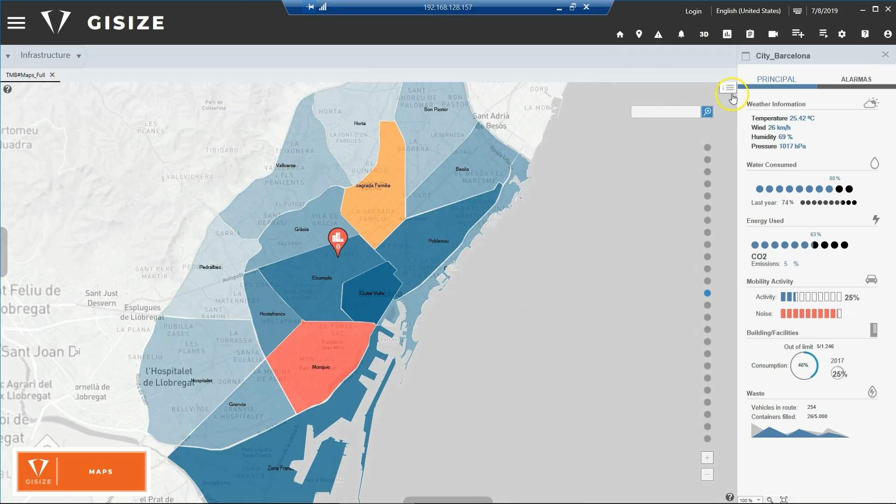This is the Barcelona districts, and you can see the different districts. And if there is an alarm, you can directly, on your faceplate, integrate with it, interact with it, see what's...

...happening. You have some shortcuts - specifically, if you want to go to a certain asset, you can go there. You have your layers for your convenience, whatever you want to see.

You can have your industrial graphics as well. We have native GISIZE graphics too for shapes and markers, but industrial graphics are also available for you.

On top of that, as I mentioned, Google Map is part of the map providers, but also Google Map API. This gives you some cool features, mostly UI, but don't let it fool you, because we also have things like traffic—we can embed Google traffic data directly here. And you can have offline maps, demo maps, and define a map provider as a layer and superimpose one map provider on top of another. A heat map, for example, is an interesting application.

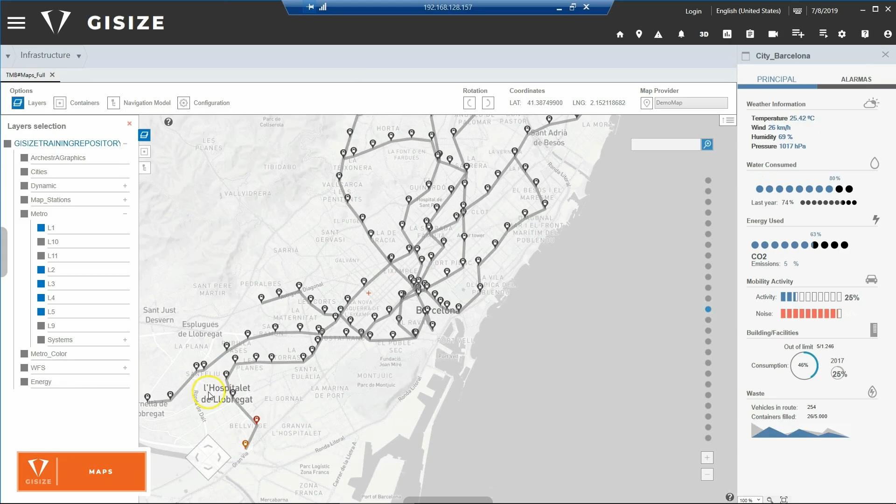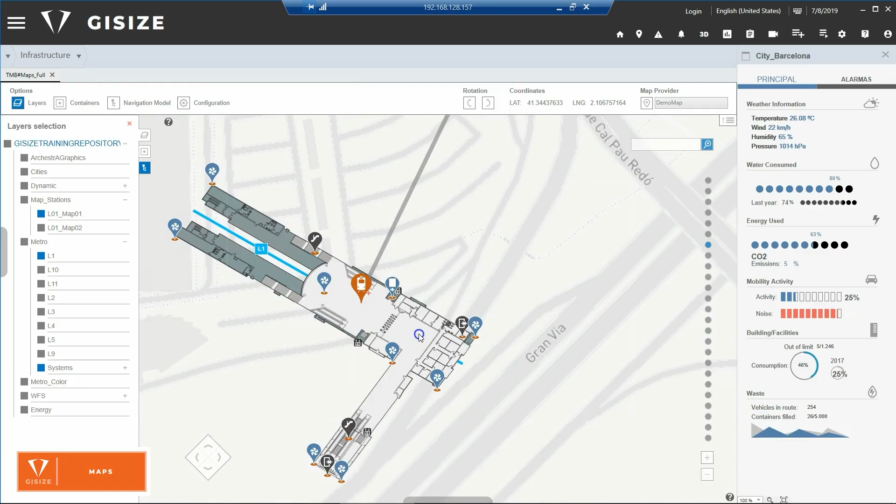As I mentioned, we can also have images as part of the map providers. This is an image, a representation of the station and your faceplate. There is a seamless integration—you cannot differentiate where GISIZE ends and the OMI application starts, because it's one and only.

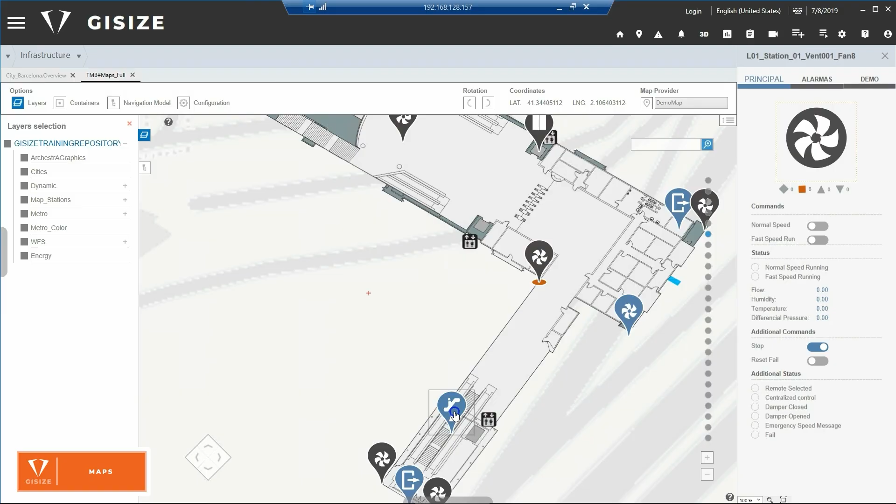Next up, scheduler and sequencer. This module allows the end user to define, manage, and execute sequences of operations directly within a system platform, and also using a web application. I can't emphasize enough who this application is for—it is for the end users. End users usually don't have the skill set to code, script, or go into the system platform to change things, but they are the experts of their domain.

So we want to give them tools to use this expertise without struggling with the tools under the hood. It features a web-based interface designed for user friendliness, similar to Google Calendar, but empowered with system platform. This is the web application—here you have your calendar.

You create an event. These events can be user-defined, or triggered automatically by events, time, or emergency responses. It can be for routine tasks or one-off emergency things—whatever the operator needs. Do you want it to repeat? When do you want to start it? What kind of plan to run? What's going to happen when you run this event? When it finishes, what happens?

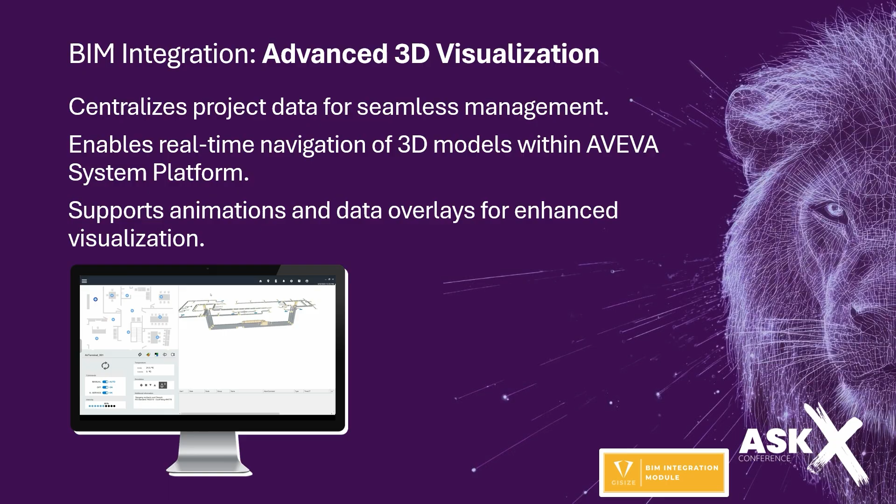Next up, the BIM integration, our final module. I'm not sure if you know the concept of BIM—I'll explain a little. BIM stands for Building Information Modeling. It's a collaborative methodology for designing, building, and managing infrastructure through its life cycle, basically from design to demolition. It's very popular in architecture and construction because in these projects there are lots of stakeholders, and a 3D model that everyone can understand and agree on gives a single source of truth—invaluable from that perspective.

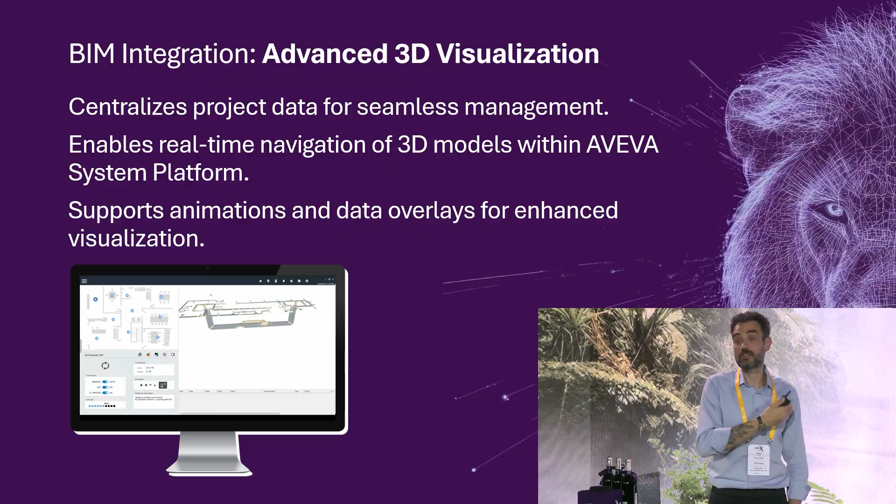What we do is add the operations part to it. We implement the BIM models within the system platform and power it with real-time capabilities. You can have animations and industrial graphics—everything similar to what you can do with maps, you can do in this 3D model of yours.

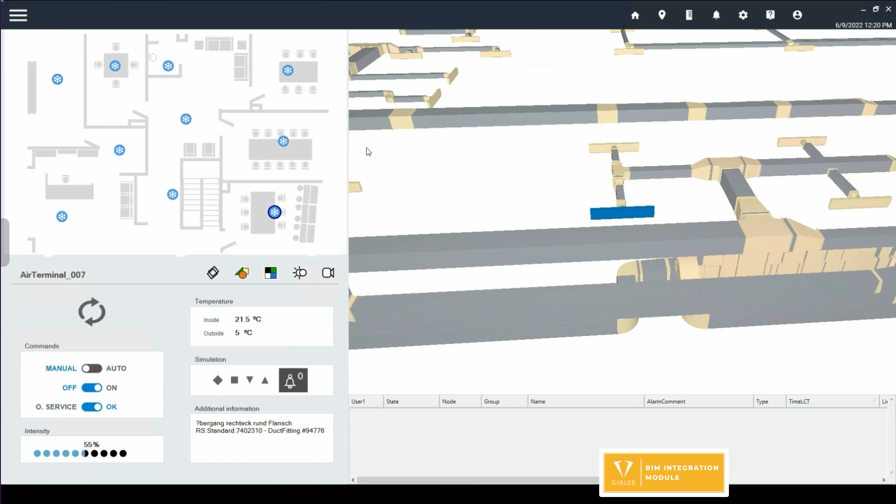And how does it look? This is a BMS demo of ours. You have bidirectional navigation between your model and your OMI application. As you can see on your faceplate, you click the fan, and it directly zooms in on the model to the fan. You also see information about this fan, and vice versa.

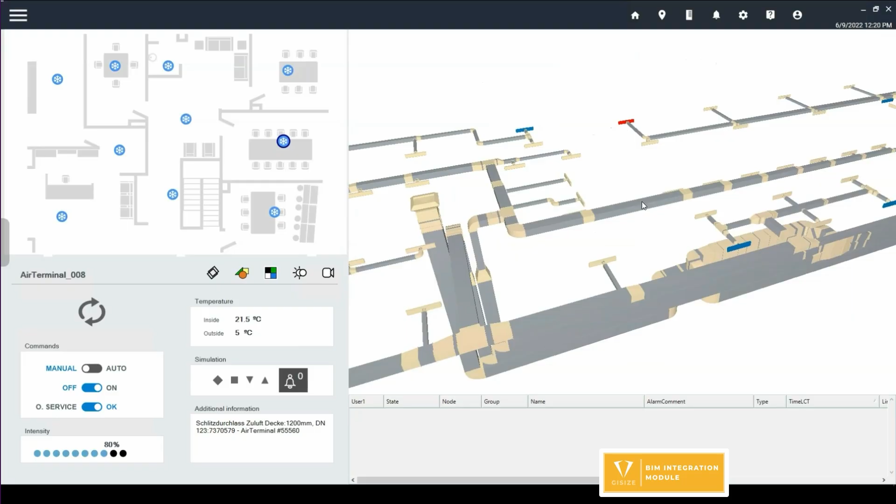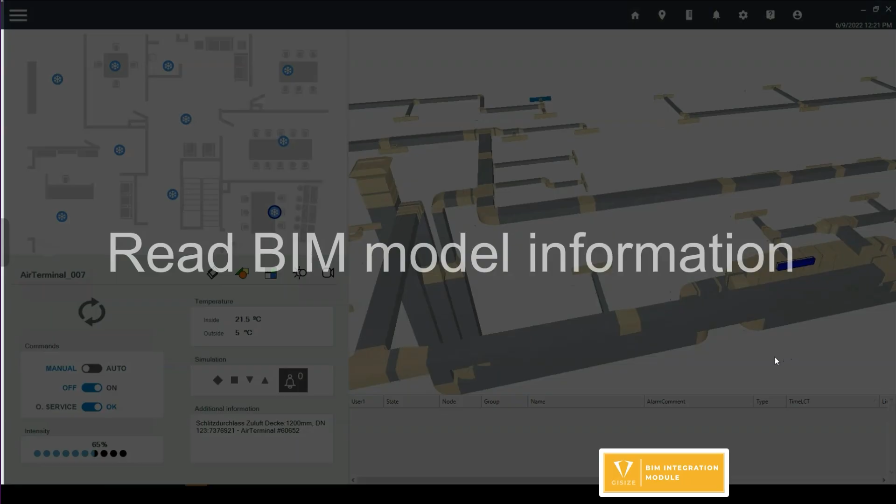If you select an asset within the model, it will directly go to the faceplate, so you see which one it is. You can also get direct information from the model—this is very valuable, as you can have all the details of this particular asset for maintenance, etc. This can be an invaluable tool.

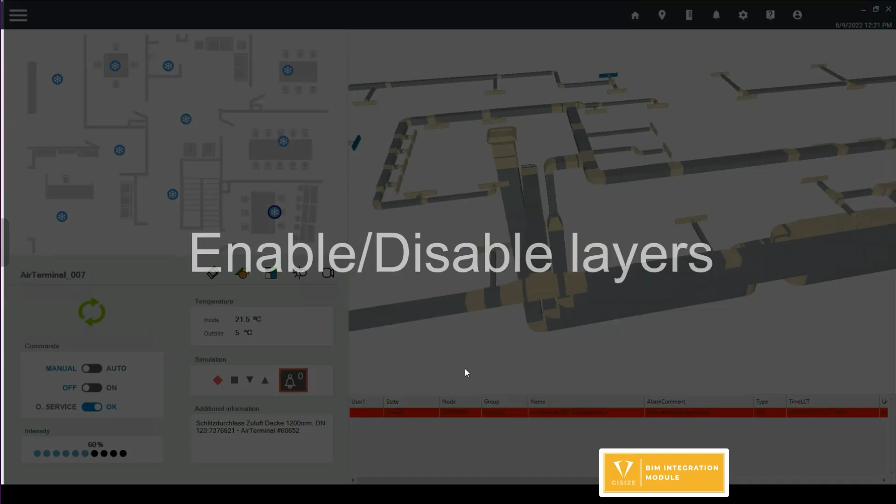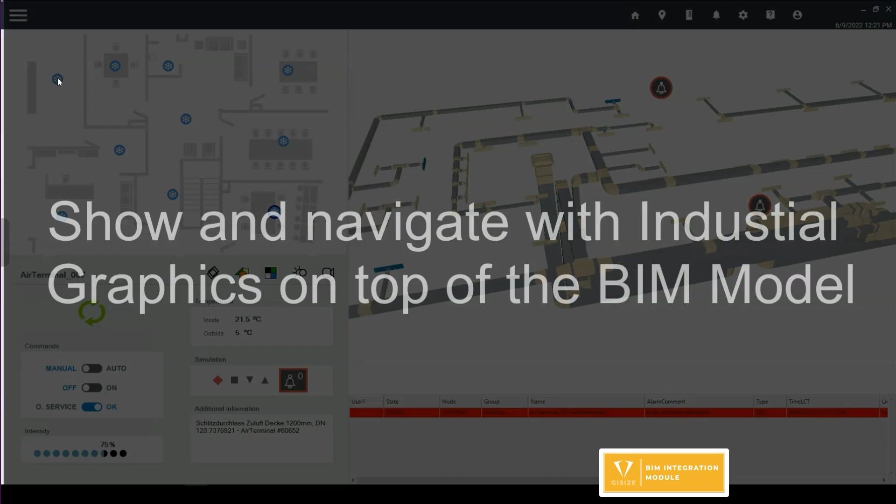Apart from that, if you want real-time interaction with the model, you need animations, blinking, changing colors. You need an option to layer certain elements, group them, and see them. Industrial graphics are obviously part of it—you can define industrial graphics for assets with read and write capabilities.

And that will be it. So, okay, we went through the modules, that's good, the solution. But what does it do for you in the end? Well, these modules come together to have a very powerful impact in infrastructure projects in our experience. With an out-of-the-box solution, you reduce engineering tools, because the way we approach it, we are a partner as well, so we understand the pain points of both system integrators and end users.

So we want to come up with solutions that can help system integrators develop easily and fast, and end users have all the things they need. This is the DNA of our R&D department, let's say. All these together help the end user have what they want. It improves their decision making, reduces the total cost. You have a better ROI with an out-of-the-box solution.

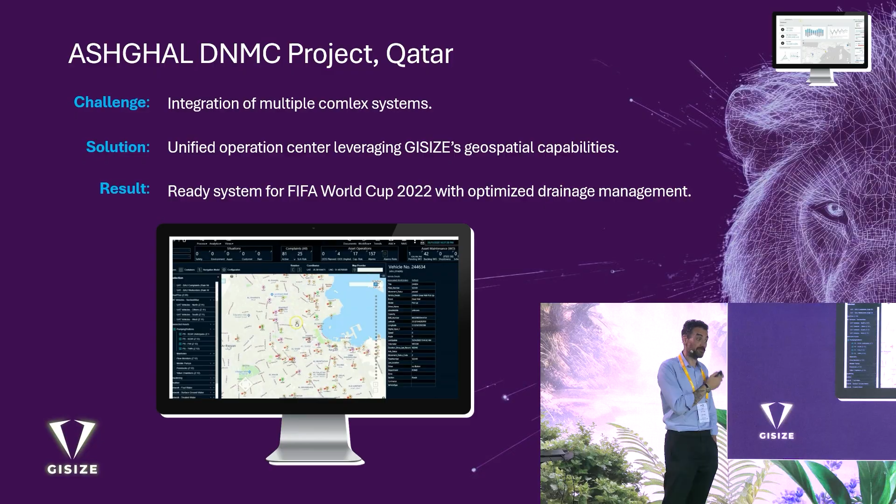When we talk about GIS providers, these are complex systems, and it's not only showing tiles, but also lots of data. And when I say data, in this case their database had over 1.7 million assets that change continuously. We were able to have the operators access all this data in real time, with GISIZE being at the core of this application.

And finally, something from home: the Barcelona tunnels project. Here the priority was several things. One is high availability, obviously, tunnels being extremely critical infrastructure, this goes without saying. They wanted intuitive controls, and they wanted to transition from legacy systems. That was key because there were some proprietary systems they were not happy with, so they wanted to move forward from that. And a combination of HMI, scheduler and sequencer, and maps, used to be called geospatial.

We managed to provide them a system that they wanted. Together, these capabilities create a resilient, modernized tunnel control system aligned with both local operational needs, but also scalable for future projects. This part is very important, because now in Spain all the public tenders for tunnels require a type of scheduling tool. They were so happy with this solution, and we rolled out this solution in over 20 tunnels around Spain. So now it's part of the tenders.

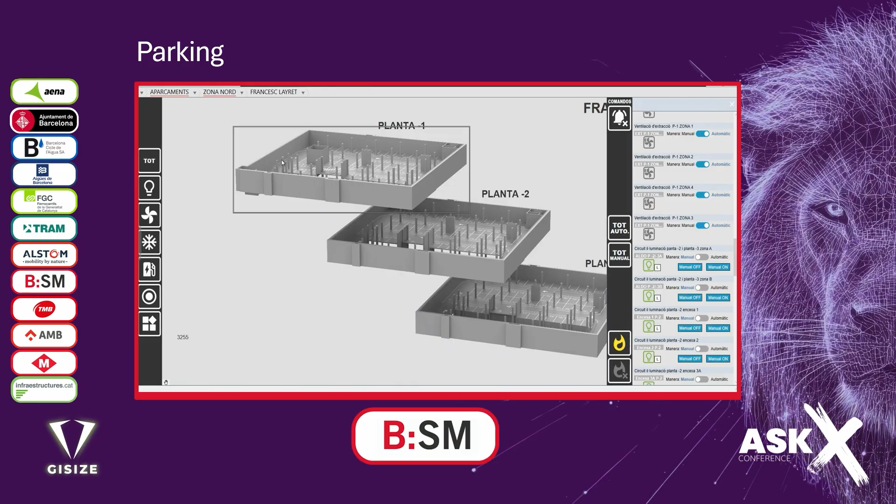And from there we moved to BSM. This is a BMS project for parking lots within Barcelona, so scheduler and sequencer was part of this project. This is an interesting project because the success of it led us to tunnel projects, because tunnels and BMS - well, tunnels are kind of a BMS, but more. A simple BMS success was really helpful for these initial tunnel projects.

And finally, another project: electric buses, managing the electric bus fleet of the city of Barcelona. This is a cool project because it's not a critical project. This enabled us to use some cool and innovative features of the system platform.

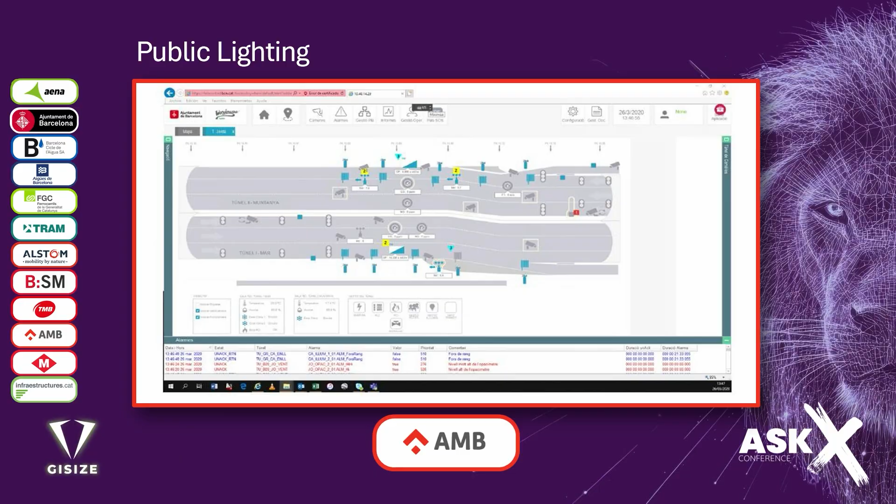And tunnel - these are all tunnel projects around Barcelona city. And finally, all culminated to this huge project, Metro Barcelona. This project is even bigger than Aena, even more ambitious. The greatest and best of AVEVA was poured into this. We're talking about, again, around 700 users, but 8 million IOs, multi-galaxy approach. It's huge, and we're really proud to be part of that project.

So in a nutshell, this is our journey throughout Barcelona, different stakeholders, how it all came together. And of course, in Europe, the smart city projects are fairly different than a project in the Gulf or in India, where you can have greenfield projects. Here we have to work with different stakeholders, different entities, different projects coming together to create a cohesive - not one project per se, but big footprints for our solutions.

But if it was just one control room under one UOC platform, it might have looked like this. This is our UOC demo for Barcelona. Here you can see all these systems.

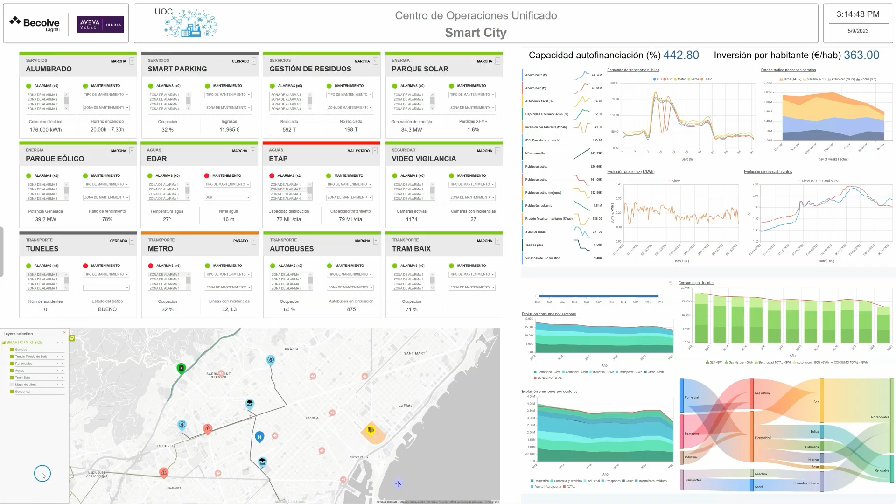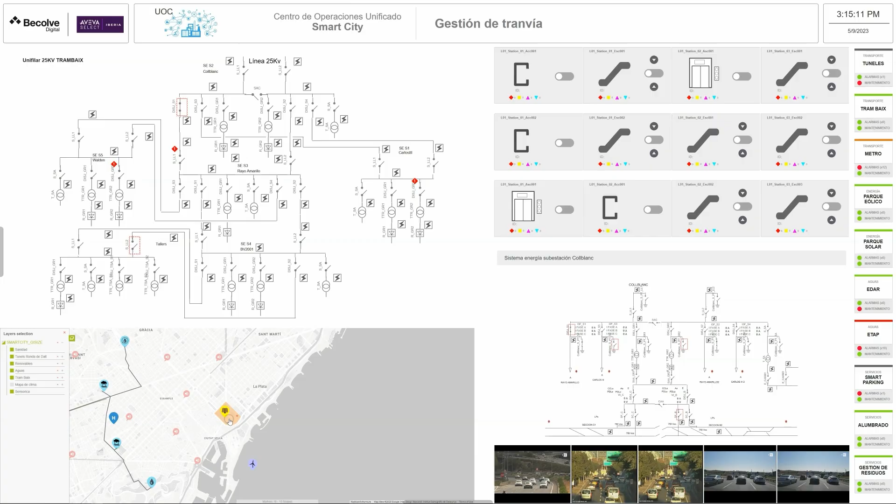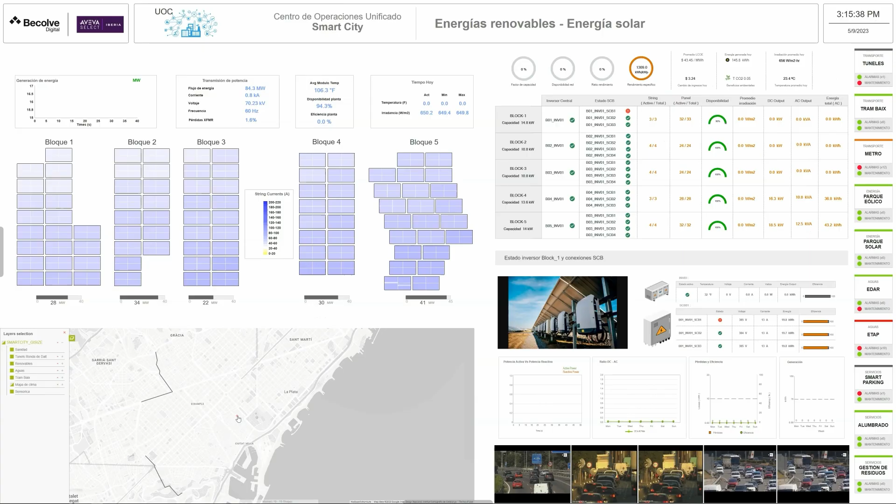You can navigate through the map and see in your faceplates all the relevant details of the city. Here you have a solar park, let's say - when you click you see all your solar panels, individual panels you can go and get operational information about. You have your wind farm, you can go see all the detailed information of individual wind turbines. I see your industrial graphics and have this information there.

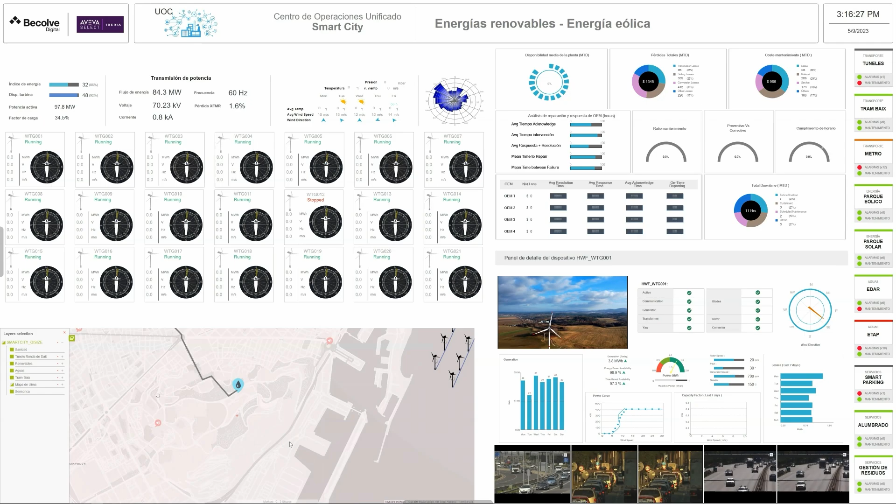This is a little bit of a vision - like, if we had one system, one application managing multiple systems.